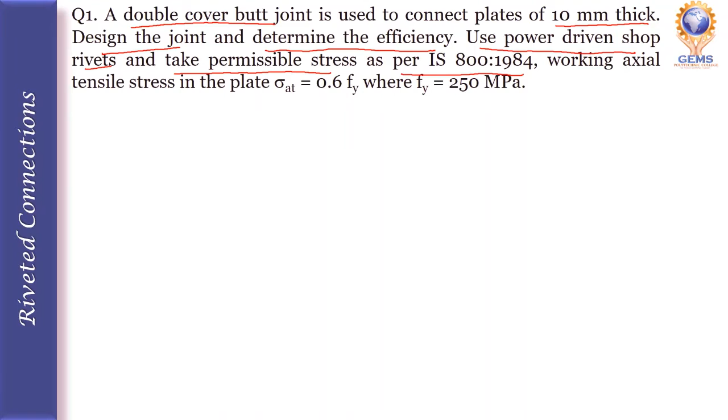In this joint we are using power driven shop rivets, and take the permissible stress as per IS 800:1984. The working axial tensile stress in the plate, sigma AT, is equal to 0.6 Fy, and Fy is 250 megapascal.

What is given in this question is T equal to 10 mm, and we know the permissible stresses. Tau Vf, the permissible shear stress in the rivet, for the power driven shop rivet is 100 megapascal, and bearing is 300 megapascal. Sigma AT is 0.6 Fy, that is 0.6 into 250, so sigma AT is equal to 150 megapascal.

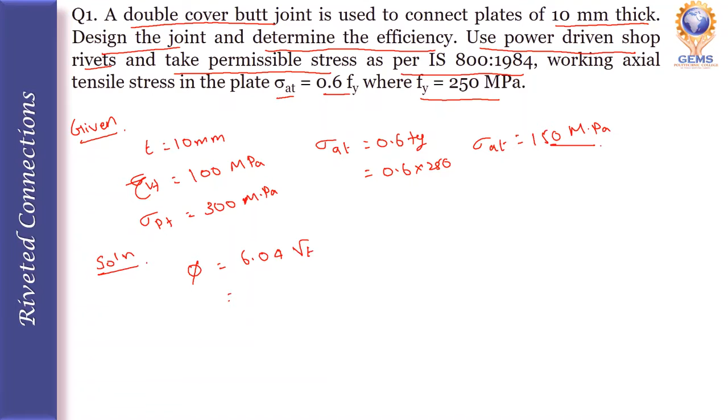First we have to find the nominal diameter and the effective diameter. Solution. The nominal diameter is 6.04 into root T, which comes to about 19.1 mm. So we will take the nominal diameter as 20 mm. Then the effective diameter: since the nominal diameter is less than 25 mm, D is 1.5 plus nominal diameter, that is 1.5 plus 20, so 21.5 mm.

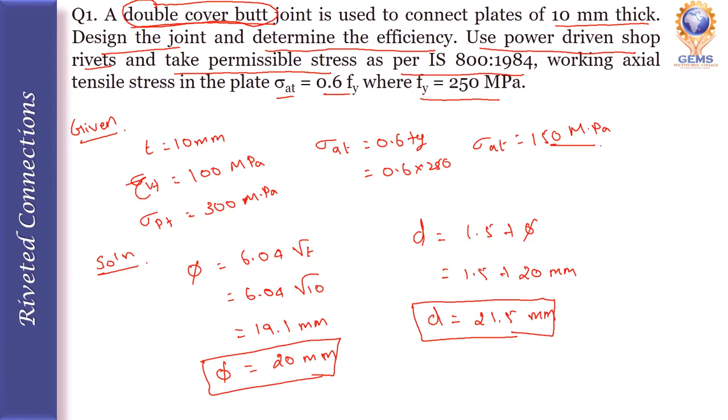The question says it is a double cover butt joint, but no thickness is given for the cover plate. So we have to find the thickness of the cover plate. If not given, thickness of the cover plate TCP is equal to 5 by 8 into thickness of the main plate, which is 6.25 mm. We will take it as an 8 mm thick cover plate.

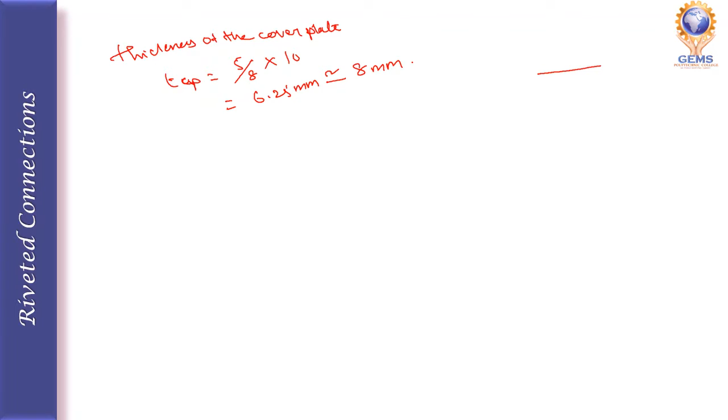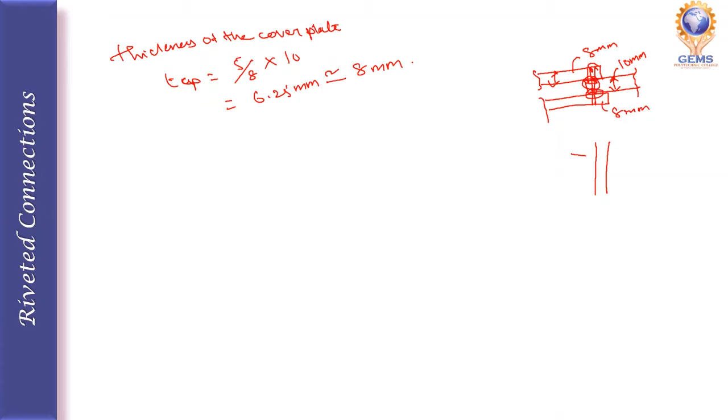Assume this is one cover plate, this is our main plate, and this is another cover plate. The main plate is 10 mm and we are assuming the cover plates are 8 mm thick. If you have a riveted connection here, the rivet will undergo double shear. Here one shear will come, and here one shear will come. So two shears will come.

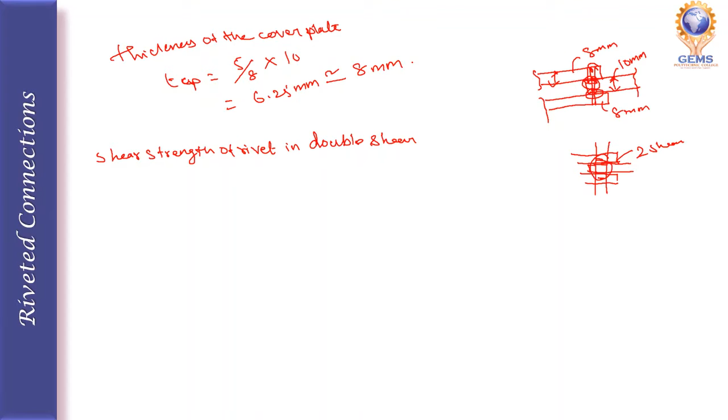So we have to find the shear strength of the rivet in double shear. The formula is PS equals 2 into pi by 4 d square into tau Vf. So it is 2 into pi by 4 into 21.5 square into 100. It gives 72.61 into 10 to the power 3 Newton, or 72.61 kilonewton. This is the shear strength of a rivet.

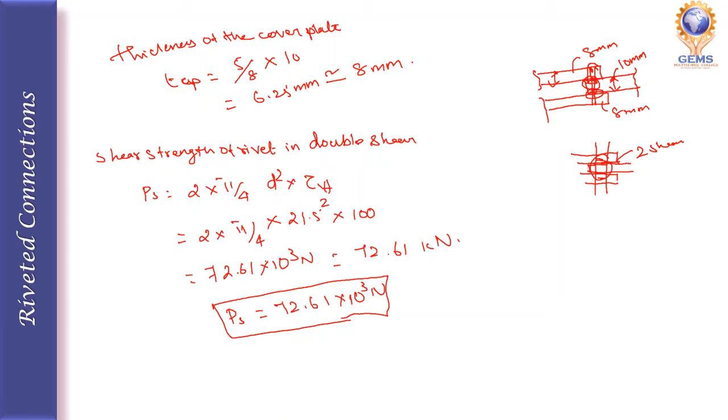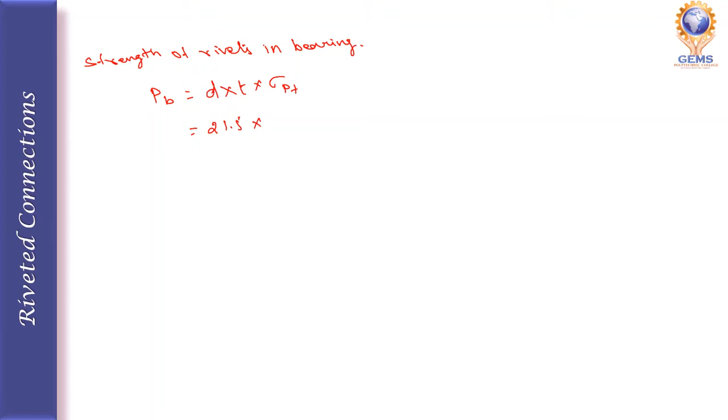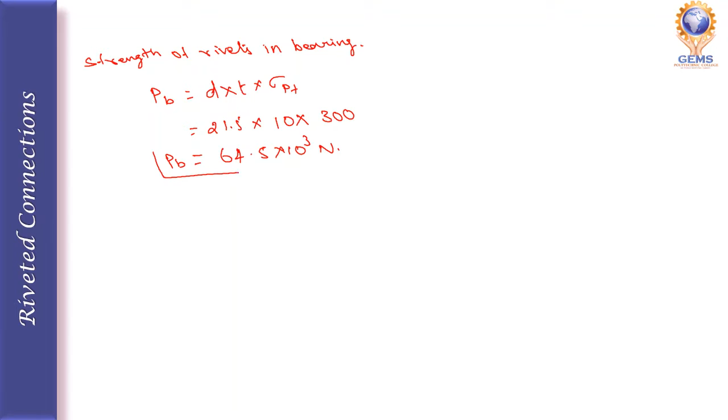After the shear strength, we have to find the strength of rivets in bearing. The formula is P suffix B equals D into T into sigma PF. D is 21.5, into 10, the thickness of the main plate, into 300. It gives 64.5 into 10 to the power 3 Newton. This is the bearing strength of a rivet. These are the first two steps.

The third step is to find the strength of the rivet. If you see the previous videos, we know the design procedures. The strength of the rivet, P suffix R, is the smaller of shearing and bearing strength. PS is 72.61 into 10 to the power 3 Newton and PB is 64.5 into 10 to the power 3 Newton. So the strength of a rivet is 64.5 into 10 to the power 3 Newton.

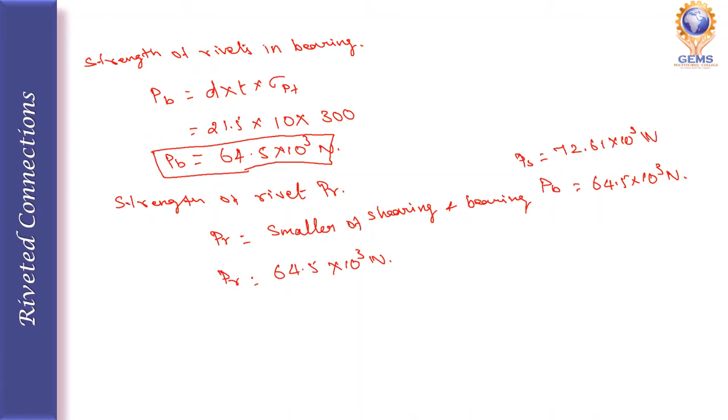The next step is the strength of the plate in tension. The first two steps are for the strength of a rivet; the other is the strength of the plate in tension. The formula is PT equals net area into sigma AT. We already know sigma AT, and the net area gives P minus D into T into sigma AT.

No pitch is given in the question, so we are assuming the pitch is equal to P. So it is P minus 21.5 into T, T is 10, into 150. So it will come to 1500 into P minus 21.5 in Newton.

So for us, pitch is still unknown. So we have to find the pitch value. How we can find the pitch value is, we are equating strength of rivet to the strength of plate in tension. So if we equate that, what is the strength of the rivet? That is 64.5 into 10 to the power 3 is equal to 1500 into (P minus 21.5).

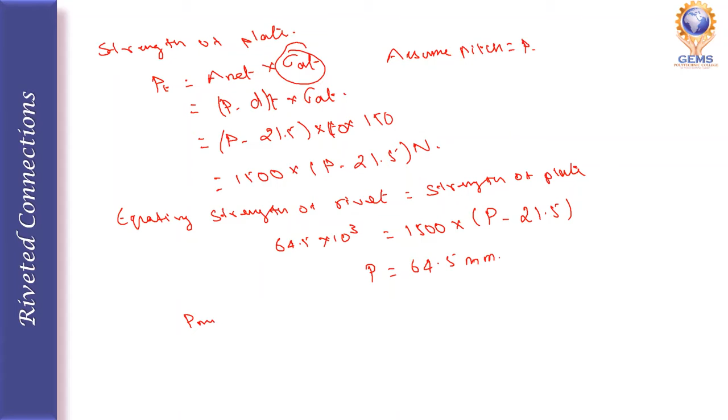So if you do the calculations, your P value is equal to 64.5 mm. So what will be the P minimum? P minimum is equal to 2.5 into nominal dia, that is 2.5 into 20, that is 50 mm. So the calculated P is okay. So we can adopt any value above 50.

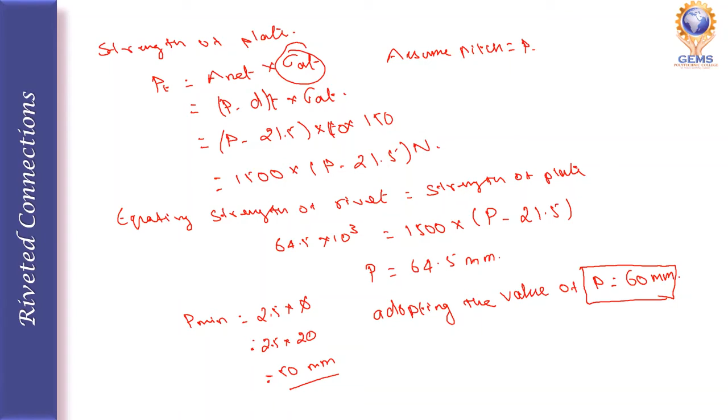So we are adopting the value of pitch equal to 60 mm. The calculated pitch is 64.5. Our minimum pitch distance is 50. So we are adopting the value of P as 60 mm. So we know the pitch distance, that is P is equal to 60 mm.

And what is the strength of the plate? Strength of the plate is PT is equal to (P minus d) t sigma AT. So PT is equal to (60 minus 21.5) into 10 into 150. It will come around 57,750 Newton. So this is the strength design of the joint. Now we are going to find the efficiency.

Efficiency is equal to strength of riveted connection divided by strength of the solid plate. What is the strength of the riveted connection? It is the minimum of PS, PB and PT. So the minimum is 57,750 Newton. So what is the strength of the solid plate? That is AG into sigma AT. Here AG we find for the pitch distance. So 60 into 10 into 150, that comes around 90,000 Newton.

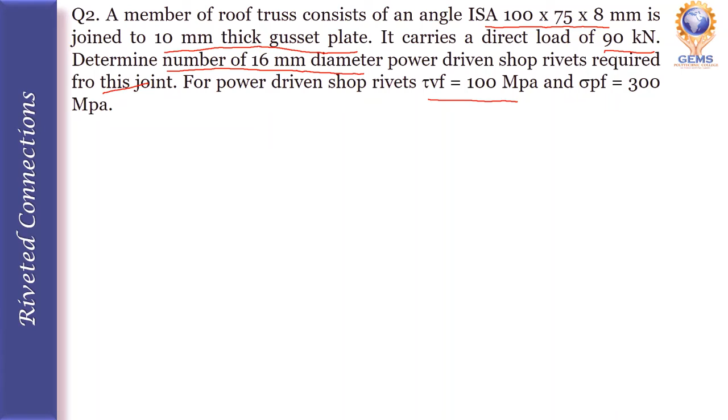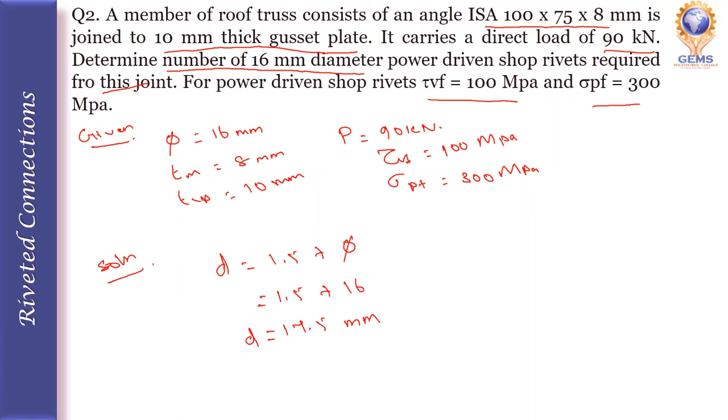So what are the given? Nominal dia 16 mm is given directly, thickness of the main plate is 8 mm, gusset plate is 10 mm, and we have an axial load of 90 kilonewton, and tau Vf is equal to 100 megapascal and sigma Pf is equal to 300 megapascal. So let's start with finding the gross or effective diameter of the rivet. D is equal to 1.5 plus nominal diameter, that is 1.5 plus 16 is equal to 17.5 mm.

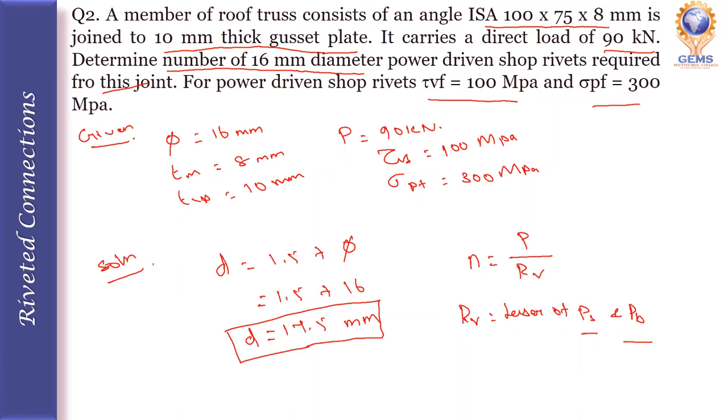So what is the formula to find the number of rivets? N is equal to working axial load divided by the rivet value. RV is equal to lesser of PS and PB. So we have to find PS and PB, then only we will find the number of rivets required for this joint. Let's start with finding PS. PS is pi by 4 d square into tau Vf.

Assume this is the connection where we have to put the rivet. Here one is the gusset plate and the other is the main plate. So how many shears will come? It will be a single shear riveted connection. That's why we are using the single shear formula. So pi by 4 into d square, that is 17.5 square, into 100. So it will come to 24.05 into 10 to the power 3 Newton.

Then what is the bearing strength? That is d into t into sigma Pf. That is 17.5 into 8 into 300. So it will give 42 into 10 to the power 3 Newton. So we know the values PS and PB. What is the rivet value? Lesser of PS and PB. The PS value is lesser, that is 24.05 into 10 to the power 3 Newton. This is the rivet value.

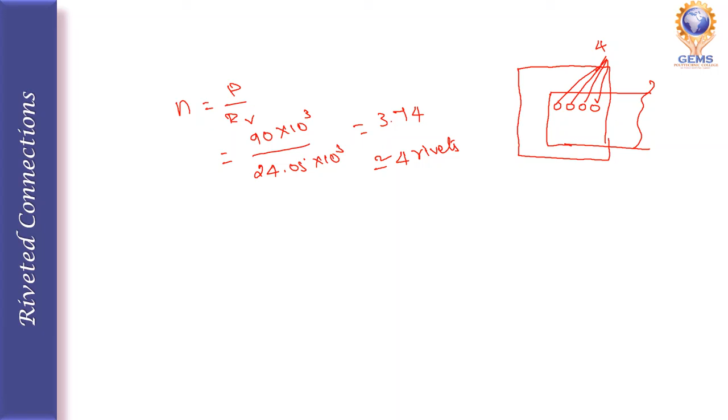What is the number of rivets required for this connection? P by RV, that is 90 into 10 to the power 3 divided by 24.05 into 10 to the power 3. It will come as 3.74. We will take it as 4 rivets. So the riveted connection requires 4 rivets, 4 numbers of 16 mm dia.

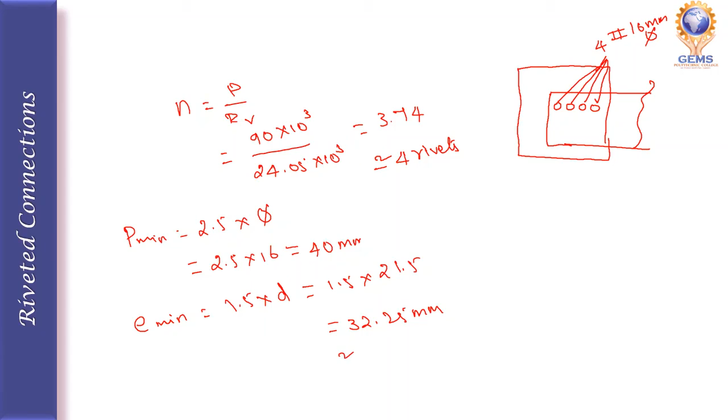So what is the minimum pitch distance and the end distance required? P minimum is equal to 2.5 into d, that is 2.5 into 16, equal to 40 mm. And for E minimum, we are assuming it is a machine cut edge. So it is 1.5 into D, that is 1.5 into 21.5, about 32.25 mm. We assume minimum edge distance is 35 mm. So this is the solution for the problem.

In this video, we saw the two problems that are related to the riveted connections.